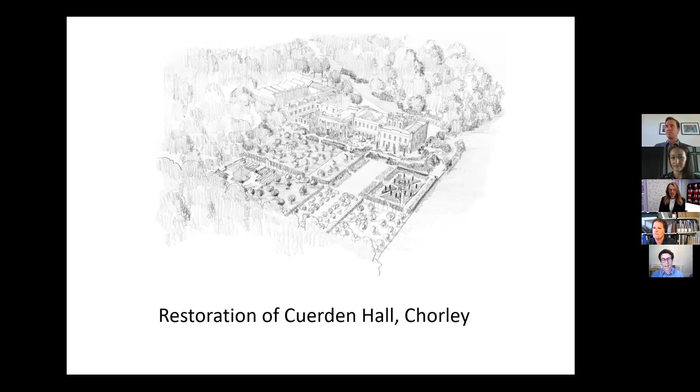Thanks, Tom, and good evening, everybody. Thank you for joining us for the planning consultation. I'm delighted to see so many people. I think we've got about 70 joining us all together. I think what you're about to see is truly exceptional.

Cuerden Hall returned to its original use and preserved for the next 100 years. It's a rare event when so many great country houses become wedding venues, conference centres or institutions. Cuerden will make an amazing family home, but I think it's much more than that. It holds an affectionate place in the hearts of local people and the former staff and patients of the care home. It has a fascinating social and architectural history, and the more research we do, the more important we find it to be, and so the more it deserves the thorough restoration we're going to carry out.

Interestingly, in its 300-year history, it's never been open to the public, and so beyond this consultation, the wealth of information at cuerdenhall.com and the planning process itself, we'll arrange open days, COVID precautions allowing, before and during the works, so that everyone can see the starting point and the progress and maybe get involved as well.

So before you hear from our historian, landscape experts and architects, I'd first of all just like to thank a few people, particularly Sue Ryder Care for preserving the building. All of the fireplaces, the ceilings, carvings, staircases and ornamentation are still in the house, and so many great houses are stripped of everything valuable. This enables us to restore everything authentically.

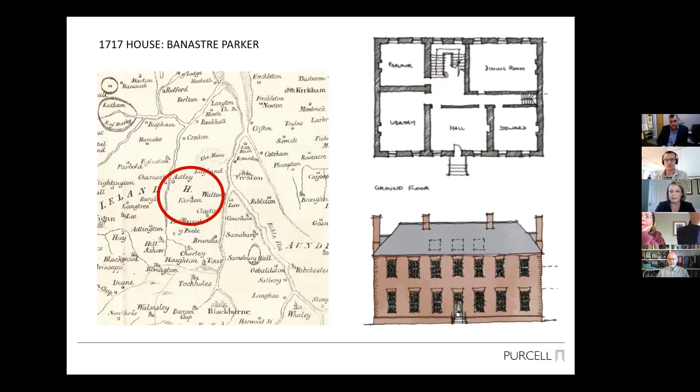That's the one that is at the core of the existing building now. Then about 100 years later, we get Banastre Parker's grandson, Robert Townley Parker, and he commissioned Lewis Wyatt of the famous Wyatt dynasty to rebuild a much grander house on the site, reusing the existing house.

It's really interesting, particularly to have found all of Wyatt's original letters and drawings to Robert Townley Parker, which are in the Lancashire archives, with the originals in the Canadian Centre for Architecture - interesting tracking those down. They're amazing evidence for what we've got in the building, but also what has been lost - things like decorative plasterwork, the conservatory, paneling, and some fireplaces. So the ability to potentially reproduce and restore those features based on evidence is really very exciting for us.

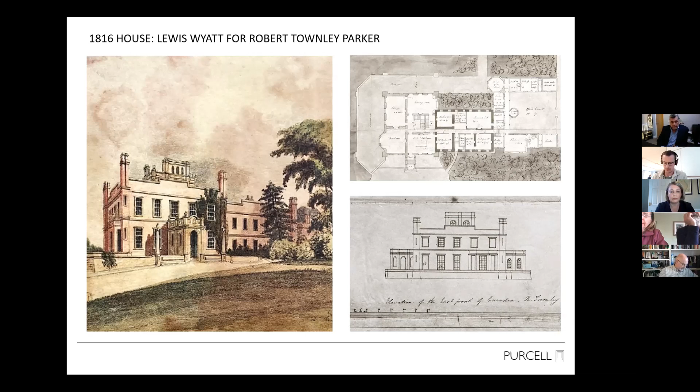Then you get to the 20th century history of the site, and it goes a little bit downhill from there. The uses were no longer a single family use, but institutional and municipal uses, which has somewhat eroded the historic features that survive in the building. It was requisitioned by the War Department and used as a hospital for wounded soldiers, which there's a lot of interesting social history surrounding.

By the 70s, it had been sold as offices for the Central Lancashire Development Corporation. In 1986, the site became a Sue Ryder care home, which continued until its closure in 2019. There's actually a lot of people that still have memories around the care home, and I'm sure there are some people on this call today - they've been in touch with us as well, which really does add to our understanding of the social value, and it's very interesting.

Very quickly here, we've got an example of the sort of - that's actually hundreds and hundreds of pages of historic letters, documents, and primary sources that we've been able to find, which have really helped our understanding of the site.

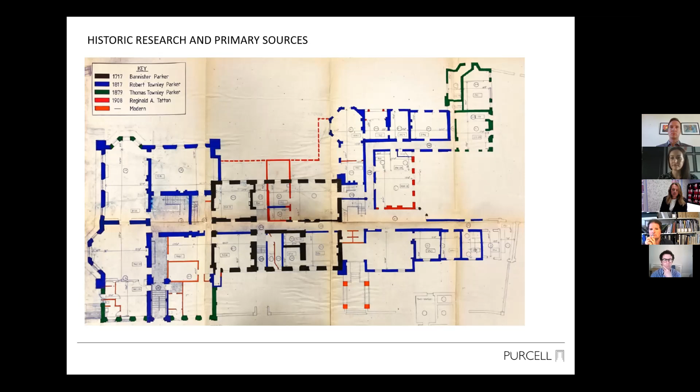From there, we're able to articulate that thing that is very special about Cuerden Hall and why it's grade 2 star. A lot of it is around the history, the surviving fabric, and intangible qualities as well. Architecturally, it illustrates that transition from the formal 18th century house through to the 19th century, more informal, picturesque, walking-out-into-your-garden sort of building and how it was used. We've got plan form that still survives, internal features, and external appearance as well, all adding to this - a lot of good intact plan form that's really interesting. In terms of historic interest, associations with the Wyatt family, as well as the local families and all the people that have memories of this building, as well as the landscapes - that's also part of the shift between the picturesque and the garden-esque style.

This is how we've been articulating significance, which will be shown in the conservation plan and on the planning portal. From left to right, you have the very high significant area of the Wyatt wing, then the 1717 house in the centre, shown in red, which is of high significance because there are quite a few more detrimental modifications in that area. Towards the right, you've got the service wing, which has lots of internal alterations and external modern extensions that are detrimental to significance.

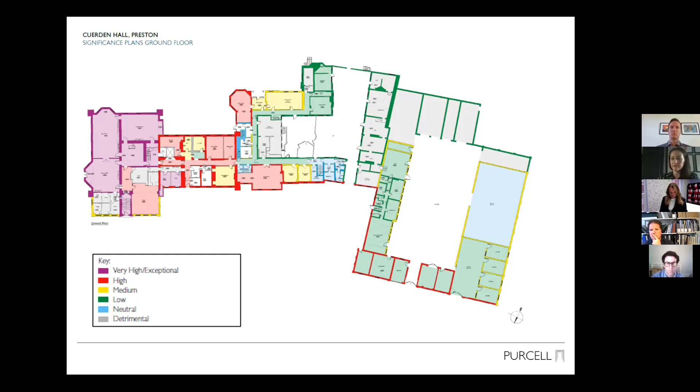Then over to the right, you have the stable wing, which in terms of exterior is very important, but interiors, well, there's a lot of fire damage and a lot of disused spaces that have really suffered from that lack of maintenance.

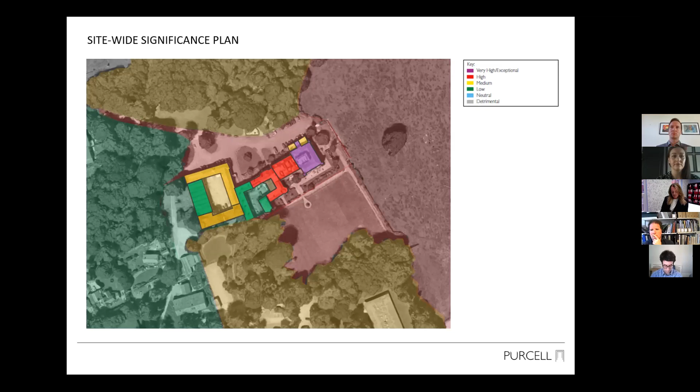It's important to remember that we want Cuerden Hall to remain viable for the future, so listed buildings need to be able to adapt to new uses and how they can be used going forward. That's why those significance plans are really helpful, because they show areas of sensitivity, but also areas where it's possible to carry out additional changes in an appropriate way.

It's important as part of this to be able to articulate where harm is so that we can seek to avoid it, minimize it and mitigate it as well. So from planning's perspective, you've got loss of small areas of historic fabric for services, as well as new door openings, but that does have a fairly limited impact on what makes that house special.

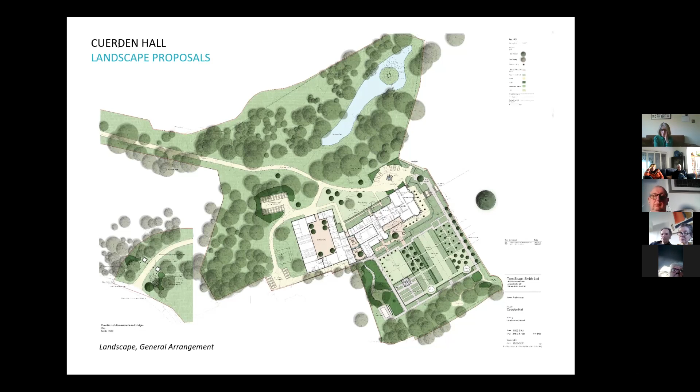The same really applies to the south side of the house, where lots of dwarf conifers and other planting have grown up over the years. So the landscape that we're going to be putting back around Cuerden Hall doesn't really bear much resemblance to anything that's been there before. It's much more formal and structured, and this really reflects the...

...way that the garden has become much smaller. If we were to be more historically accurate, we would just have half a dozen trees on the lawn and some planting around the house, and that would be it. That wouldn't create the kind of spaces which Colin and Gareth are looking for.

This, in fact, was an early sketch, but where we are at the moment is not that different from it. You can see there's a main vista laid out to the south of the house, going down to the existing plantation, and then gardens laid out on either side. A rose garden, a little orchard on the right-hand side between that main vista and the park, with a terrace walk so that you're walking along on top of the existing ha-ha, which would be restored, looking out into Cuerden Valley Park.

On the other side, the bit closest to the house is now developed into a croquet lawn, and then we're going to build a proper functioning vegetable garden—a garden to produce, not only to be beautiful, but to be productive as well. You can see a little square greenhouse. That's changed slightly in position, but the principle has stayed the same.

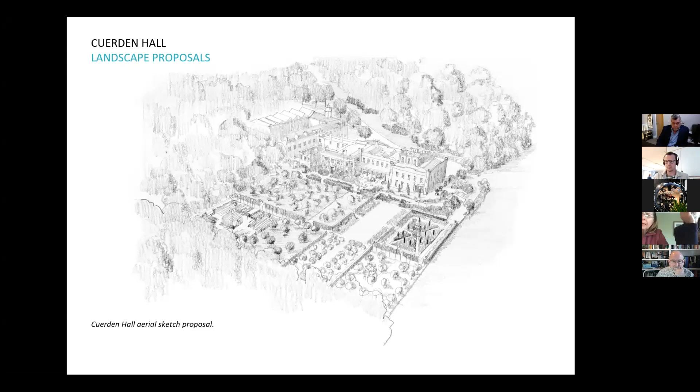So if we go on to some of the other images, this is again an early sketch of proposals around the house—much more planting than is there at the moment, but a bit more organized, less wild willows growing out of the walls virtually, and much more ornamental horticulture. The terraces are kept clear but have formal planting growing in them, maybe like Versailles, or those on the left-hand side are Irish yews growing straight out of the terrace.

You can see the distinction between the more grand, formal rhetorical character of the planting around the house and the slightly more intimate area of planting around the 18th century house. That reflects the difference in use between the two parts of the house.

One part is more formal, for events and parties and that sort of thing, and the other is the more private part of the house. If we have the next image.

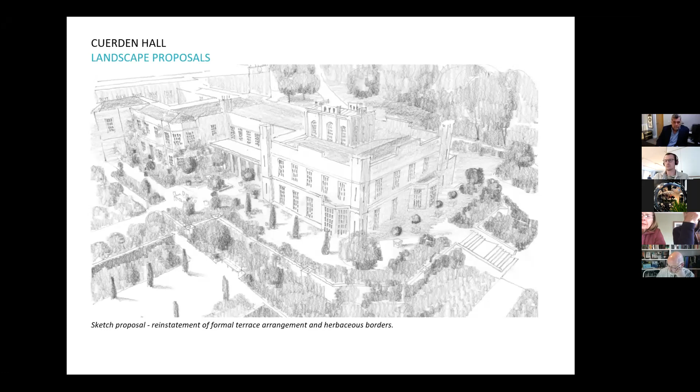Next one. This is a sketch looking towards the house, a little aerial sketch showing the idea of new trees, much less tarmac around generally, and more concentration of ornamental planting around the house as you approach it.

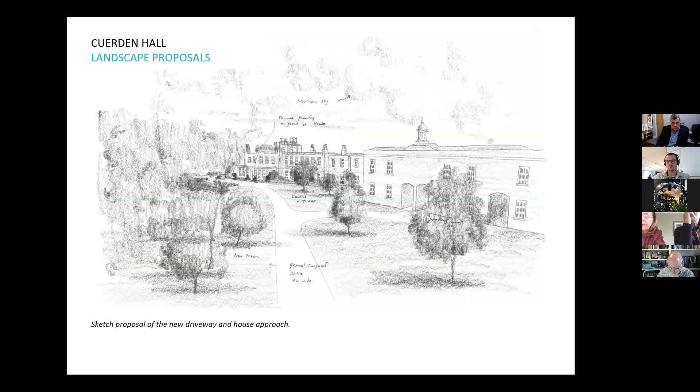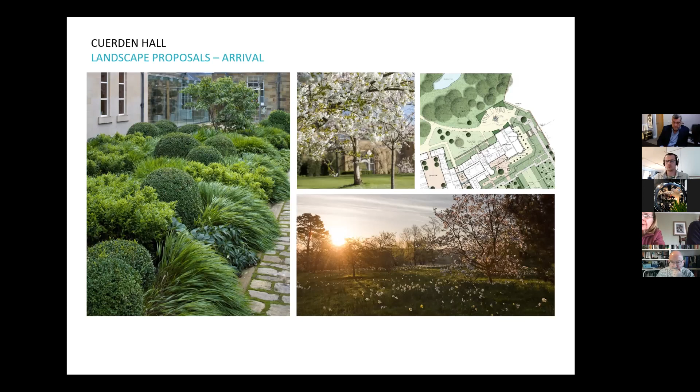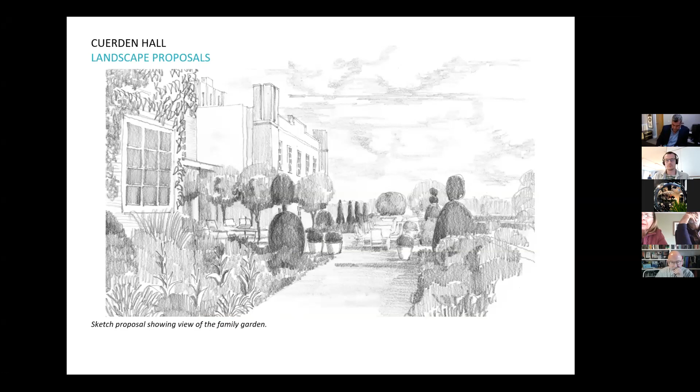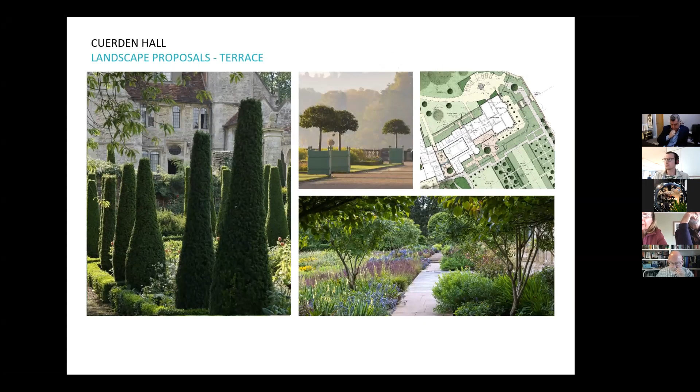Colin and Gareth have both said they would want occasionally to open the garden to the public, and I think that will mean it's kept to a really high standard, which we should all welcome. It makes it all the more exciting for all of us.

We're going to use both very formally clipped hedges and less formally clipped hedges, like this one in the bottom right.

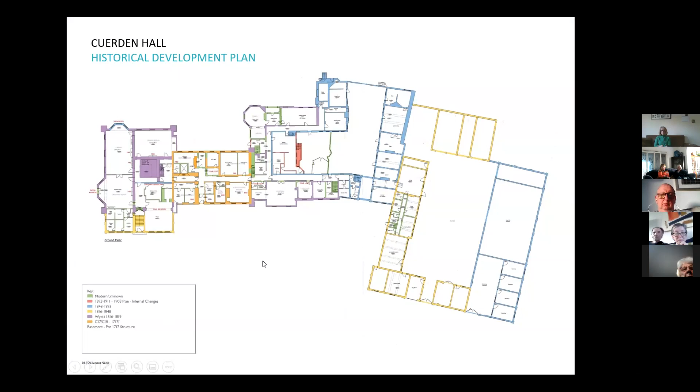So just to summarise what Becky was saying earlier, the house developed in a number of stages, beginning with the 1717 house at the centre of the plan, and Lewis Wyatt then added the extension to the east side in about 1818.

In terms of significance, we believe the highest significant spaces are the Lewis Wyatt wing — this is where the best interiors survive and they're the most intact. The 1717 house, although older, has been heavily altered during the building's use by the MOD and later as a care home, and therefore has reduced significance in that section, although still high, with some areas even of detrimental change where alterations have taken place.

Moving on to the service wing, as Becky said, we've got a number of newer extensions within the courtyard which we believe are detrimental to the heritage significance of this part of the building. The areas of highest significance are parts of Lewis Wyatt's original service yard, but that yard was encased with a corridor internally to the courtyard with a number of extensions and also a first floor, all of which have detrimentally impacted the significance of that part of the building. Then subsequently in its use as a care home, and prior to that, it suffered from a number of alterations within that part as well.

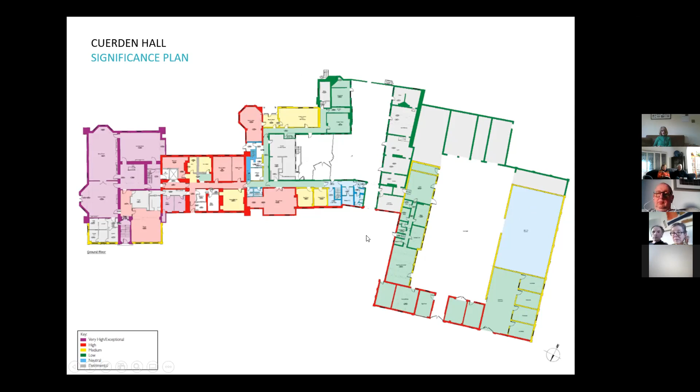So that understanding of significance allows us to understand which areas of the building have greater capacity for change. This block plan gives you an idea of the areas of the building which I'll discuss in more detail over the next 15 minutes: the Wyatt wing, the 1717 core, the service court, the office wing, and the stable yard.

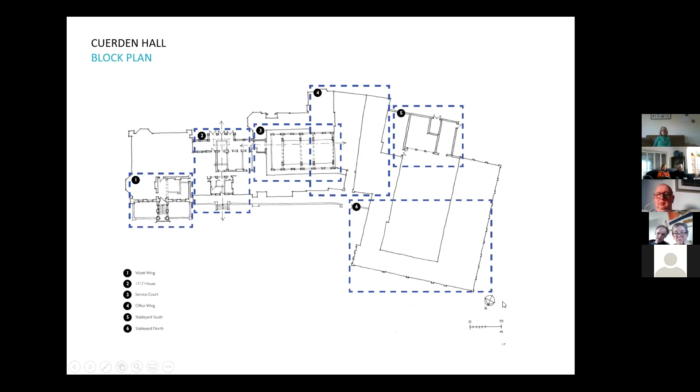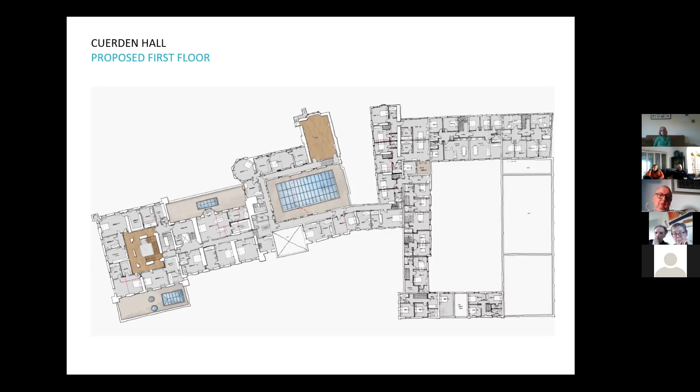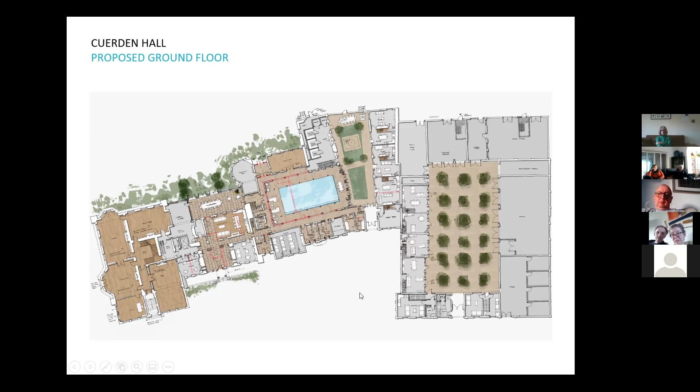Just to quickly say something about the general uses across the building. It is a private house for Colin. The living accommodation is within the western part of the building, the Lewis Wyatt wing and 1717 house. There are also leisure facilities associated with Colin's use, and then into the office wing and stable yard, we've got a series of guest cottage accommodation for visiting family members and friends, which has access to the leisure facilities. And then we have a number of staff cottages within the stable yard, as any country house of the 21st century will obviously require some staff accommodation. As we've seen from Tom Stuart-Smith's presentation, the landscape will require 2 or 3 full-time gardeners, and the intention is that they're housed on site.

So it's a more formal part of the house for Colin and Gareth to entertain guests, and it's really presented almost like a country house restoration in that part of the building.

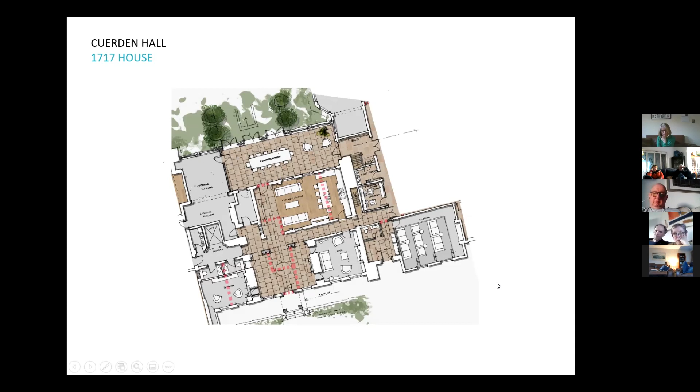The introduction of the conservatory is actually in the location of a conservatory proposed by Lewis Wyatt, and we're lucky enough to have his drawings. There are a few alterations to note. He pulled the conservatory much further out into the southern gardens to create a light well behind, which was about getting light into the butler's bedroom and the servants' hall, and also creating a screen, so from the publicly accessible gardens you wouldn't be able to see into the butler's bedroom.

The issue with Lewis Wyatt's design was that it created some very awkward geometry around this octagonal dairy, which he seemed to struggle with. So our proposal is to push the conservatory back against the building in the location of the later portico, which has mostly been demolished apart from the central bay.

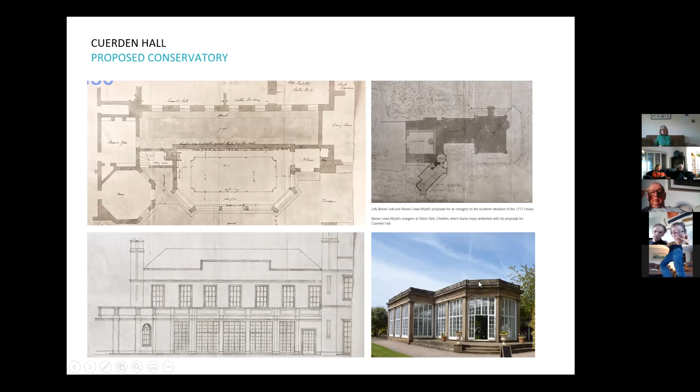We can be quite sure of what Lewis Wyatt was proposing because we have these drawings. Bottom left shows this elevation of what he intended the conservatory to look like, and top right you can see a proposal for an even larger orangery conservatory on the other side of the ornamental dairy. Lewis Wyatt was clearly struggling with the geometries in that location and wanted something bigger. There's also an orangery by Lewis Wyatt still standing at Tatton Park in Cheshire, and this image bottom right we've included so we can be very sure of what that looks like.

This image shows our proposal for reinstating a conservatory orangery on this site. It's been developed through an iterative design process involving Historic England and the Georgian Group, and through that process it was felt it shouldn't be a direct copy of Lewis Wyatt's intended conservatory, but should read as a new intervention in appropriate materials. So this is a sandstone conservatory orangery with timber glazed doors and fan lights, set out using principles of proportion used at the time, but not a copy of the Lewis Wyatt orangery, so future historians aren't confused about the historical development of the house.

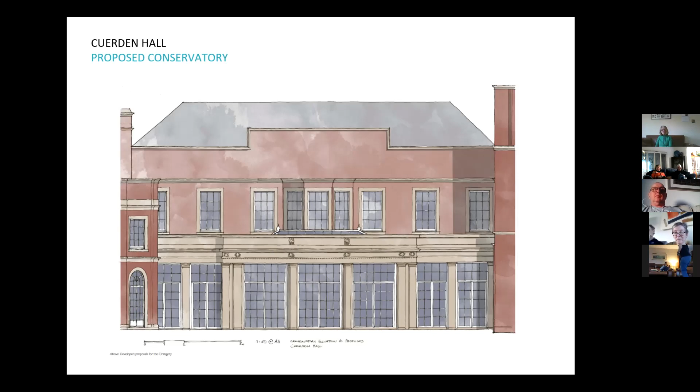Moving on to the service wing. The proposals here are to provide leisure facilities for the private use of the owners of the house. This seemed like the best place for those facilities, because there are significant views of Cuerden Hall from the driveway looking towards the main house, from the parkland looking back towards the house, and from the southern gardens of Tom Stuart-Smith's design. So placing a new pool structure within this courtyard would mean it wouldn't be visible from those principal facades.

It's also an area that has suffered detrimental interventions in the past, with a later poor quality kitchen extension in part of that courtyard. It provides an opportunity to address structural issues with some of the courtyard walls, which are bowing out — the courtyard wall was added later and doesn't seem to have been very well tied back to the fabric.

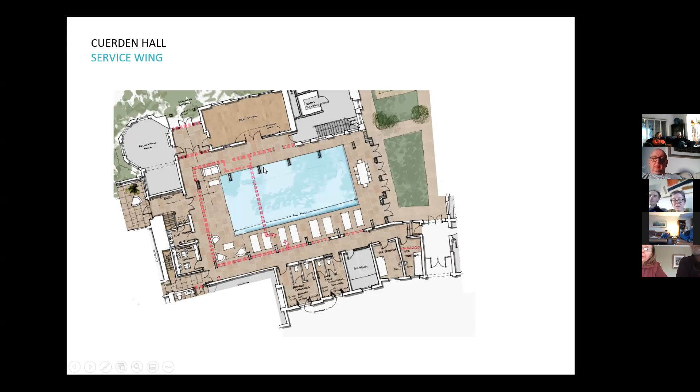So those are the proposals, and these images again give a sense of what those spaces might be like. We're looking at the idea of a Victorian glass house or palm court structure — principally a metal frame, highly glazed, so that when you're within that space you can still read that you're within a former courtyard.

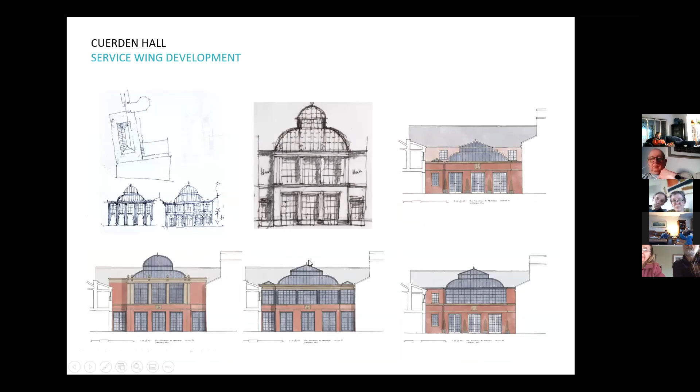This has been through an iterative design process involving Historic England and the Georgian Group, ranging from quite low scale single story up to a very elaborate two and a half story, and through that process we've really pared it back.

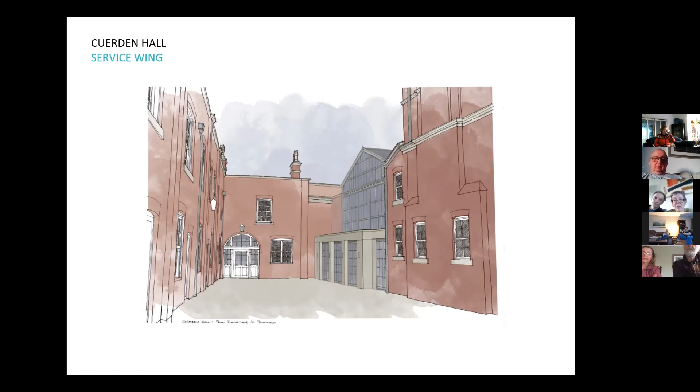This is an image of the proposed pool structure within the space. In discussion with Historic England, we've talked about the massing of this building to create a stone screen wall at ground floor level, and to push back the glazed elevation and glazed roof lantern, both as a means to bring extra light into the courtyard, and also to make the building a bit more recessive.

Very quickly, to say something about the stable yard. The intention is to use this for accommodating staff accommodation. These buildings divide naturally vertically, currently having structural vertical walls and structural chimney stacks running vertically through the building.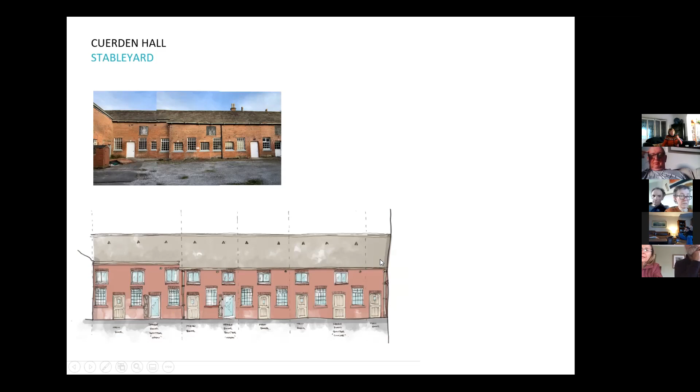They also have numerous doorway openings at ground floor, which were obviously for the horses into the stables. As you can see in this image at the top, some of those doorways have been blocked up, with poor quality brickwork infills below a number of the smaller windows at ground floor. The intention is to reopen those so you can read the rhythm of the original horse stabling, and then create additional staff accommodation in the redundant hayloft spaces above.

Then to the southern range of the stable yard, this is the range of the building which has been destroyed by fire. It is a roofless ruin currently, missing the first floor and the roof structure. The intention here is to reinstate that roof, the first floor and the roof structure, and to put accommodation above, again for staff.

There'd be a number of staff apartments on the first floor, and on the ground floor this is to create a space for garden stores, workshops, and a machinery store for small tractors used for mowing the grass in the grounds.

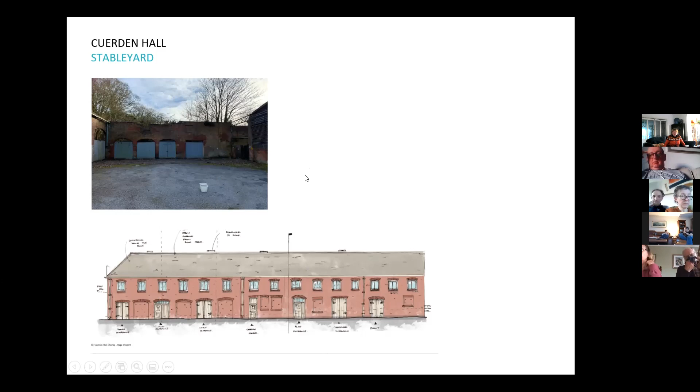It's important to say that Cuerden suffers, like many country houses, where the estate has been split up and sold off. Many of its ancillary accommodation, the walled gardens and all of the gardeners' accommodation, now sits outside of the estate in commercial use over towards Cuerden Valley Park. So these spaces are really critical for the function of a 21st century country house, and for a landscape as intricate and complex as Tom Stuart-Smith's.

Finally, to end on the proposed lodges at the end of the drive to Cuerden Hall, at the junction of Shady Lane and the drive. As you will know, Cuerden originally had a number of lodges, one of which remains, the Stag Lodge, on the other side of the M65 and M6, but it's completely severed from the estate now, and pretty much invisible behind some tall mature planting.

But there was also a lodge at this junction, at the end of the drive with Wigan Road, and we have all the drawings for those lodges proposed by Lewis Wyatt. There was also a very monumental lodge and sort of triumphal arch at the end of Berkeley Drive, which no longer exists. So this proposal is really about reinstating some of the experience of arrival at Cuerden Hall.

Originally, you would have arrived at Stag Lodge, travelled across the parkland on the original carriage drive, seeing the house from a distance and arriving through this great picturesque sequence. But currently the house lacks that sense of arrival and that experience, and we believe that has a detrimental impact on the significance of the building.

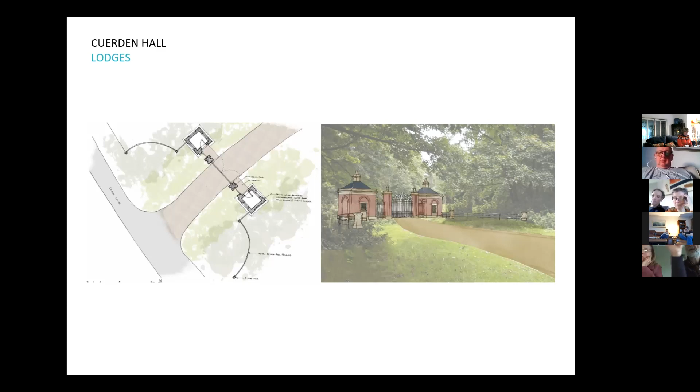So the intention is to replace a set of gate lodges more or less on the location of the existing modern gate piers. This has again been developed in discussion with Historic England, through an iterative design process, and it was felt these lodges should not match exactly the Lewis Wyatt proposals, but should be in the spirit of Regency lodges.

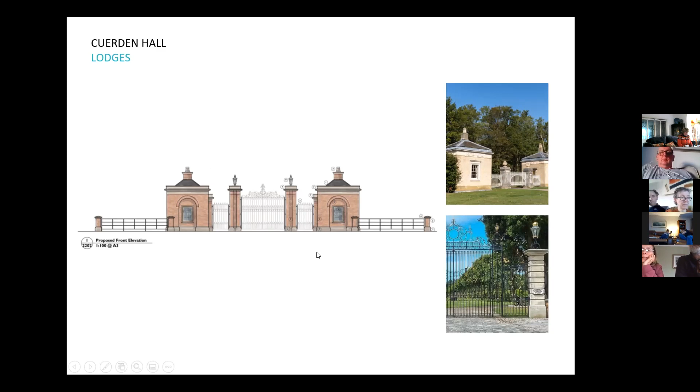Thanks very much to the design team, Rebecca, Tom, and both Toms. I hope everyone found that fascinating in terms of the history of the complex of buildings, and hopefully everyone appreciates what we're trying to do here, which is provide a sensitive restoration to Cuerden Hall and the grounds.

If I pick up on some of the questions raised, there's been a couple about the proposed use and rumours about a potential spa facility or spa resort. I'd like to make clear this is a conversion to a family home, with some ancillary staff and guest accommodation, but it's primarily a single family home. In the past there have been proposals for hotels and apartments, so it's refreshing to see this returning the hall back to its original use, the most sensitive use for the building.

If I go down the questions, there have been a few about access, but that's more a legal aspect, not really a planning related matter. Equally, there's a question about water supply for local houses. I'm not too sure what that's asking, but we have a drainage strategy that will be submitted with this application, confirming the drainage for the proposals is acceptable.